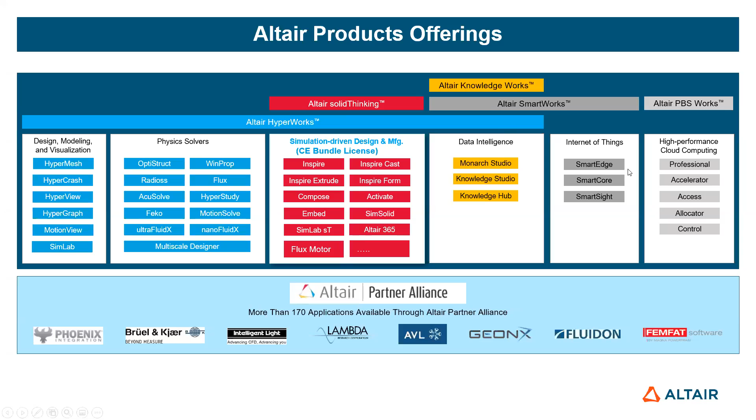And since there are hundreds of software products, it will be very difficult to talk about all of them. This slide helps me give you a very high level overview of the categories of software available from Altair. If you see the buckets in the center, each heading specifies a group of products, which gives you a hint of where our software is available. I take care of the center one, highlighted in red, that is simulation driven design and manufacturing products, related to mechanical, electronics, and all kinds of product creation and product design. And then we also have other products such as machine learning, IoT, and high performance computing.

So now coming to the topic for the day, that is simulation driven design. What do we mean by simulation driven design? You all know what design is, right? Simulation driven design is what we have been promoting for the last 5 years or so with our technology: when you are designing, performance of course should be your starting point. But we are going one step ahead and saying that not only performance, you also should consider manufacturability as your starting point and give it equal importance, if not more, when you actually start creating a product concept.

So by taking both these requirements, you will create your concept through the platform of Altair. And when your concept is ready, you will again validate that concept under the simulation driven design framework for both requirements, that is your performance requirement and your manufacturing requirement. As a result, when your design is completed using this methodology, you will not only ensure that your design is structurally or performance test worthy, but also that your design is manufacturing worthy.

So that means you will not have manufacturing defects, or you will have manufacturing defects which you know already. So you will not get any surprise. So that is, in a nutshell, what simulation driven design is.

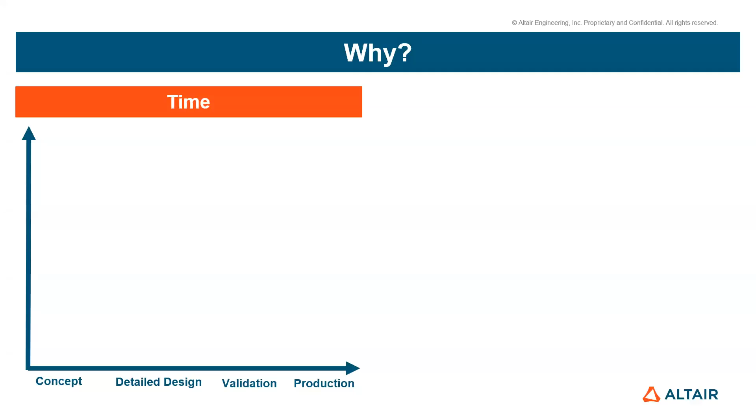Now, as you move from concept to production, you will probably agree with me that your freedom for design will keep on reducing. There are many reasons for that: you have already finalized some of the design, so your next department has also started preparing on the basis of your design. You might have already given a tooling kickoff to your supplier. You might have already planned your production facilities. That's why your design freedom keeps reducing as you go from concept to production.

But at the same time, very interestingly, one more thing happens. Your product knowledge keeps on increasing. I'm sorry, it's not a contradiction, I would say it is a dichotomy. Your product knowledge keeps increasing as you go from concept to production, obviously, because you gain a lot of experience from failure, from testing, from feedback from peers, from your market survey.

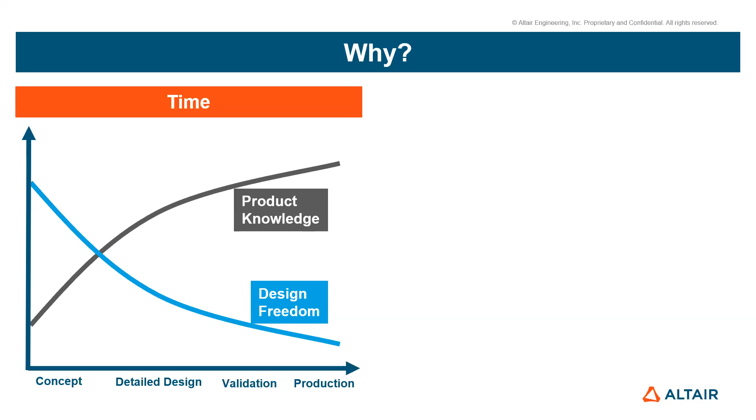That's where the dichotomy comes: you have a lot of product knowledge, but very little design freedom. This dichotomy is what we are going to solve with simulation driven design. We gain most of this product knowledge through simulation driven design and manufacturing tools right up front, very early in the design stage. So if you have product knowledge and also design freedom, you create far more efficient designs without spending too much on iterations. That's the time part of simulation driven design.

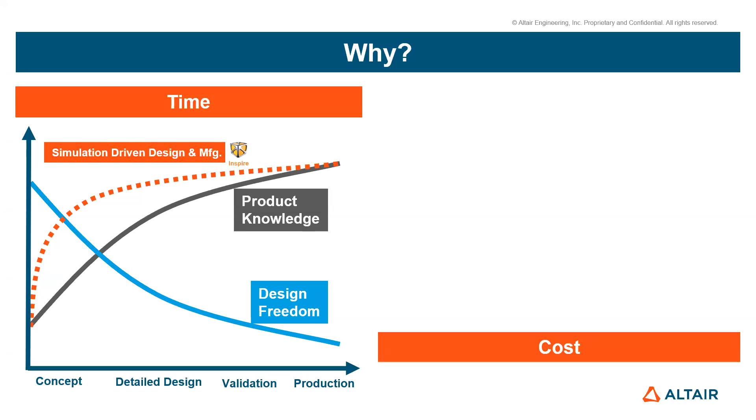As you go from concept towards production, your cost per design change keeps on increasing. Obviously, if you make a change in production, you have to change so many things. If you make a change in the concept, it changes only in the CAD tool on your computer, so it will not be costly. By the very nature of simulation driven design, most of the changes happen in the concept stage, as you have seen from the previous plot as well.

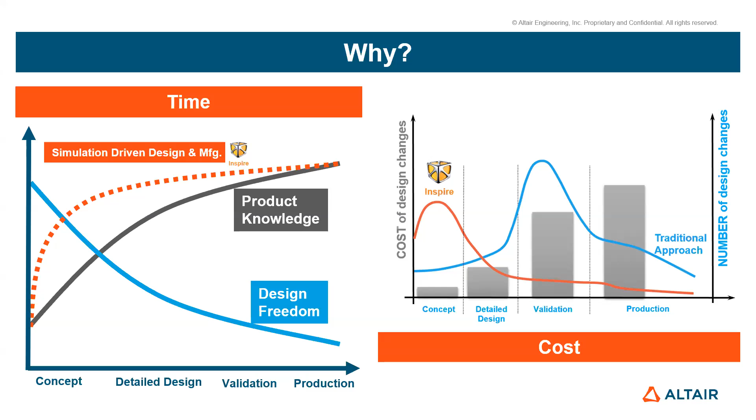With the conventional approach, typically most of the changes come from the validation stage, where the cost of change is high. So this is why we need simulation-driven design and manufacturing: to save time and cost. Now let's go to how we can achieve that.

The first step is to understand and quantify the performance target to redesign this component. Since this is part of a mechanism, you should have a mechanism simulation tool which will give you the loads coming on the system itself, on the brackets or the different joints, because this system is complex.

Your system can also be simple, where you may not have to do a mechanism study - you can directly know the load. For example, the professor was showing in our previous presentation the nose cone, where the loads are static structures, so the loads might be known upfront. But if the system has a mechanism, you may have to take a mechanism analysis tool to understand the load.

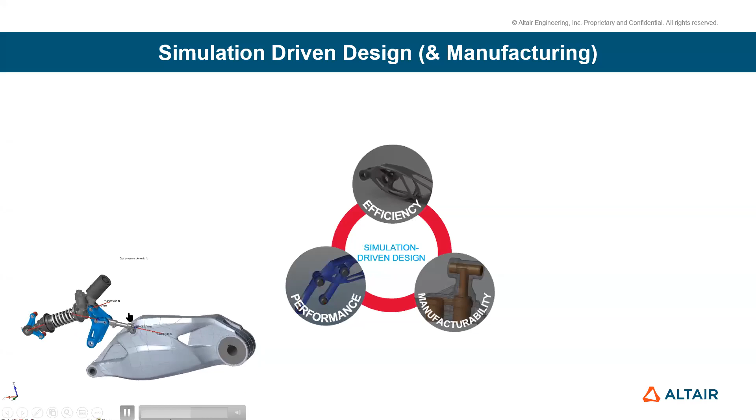I don't know whether these arrows are visible, but it is showing you the loads. Once you know the loads, you will create the recipe of your performance targets for different kind of load cases. For this two-wheeler, it might be braking, cornering, potholes, and all those kinds of load cases you will quantify and then use. So that takes care of the performance part.

Now what about the manufacturing part? If I plug a manufacturing requirement on top of it, the system will start doing the magic. Let's say I am making a design for machining - the system will take this same load and the input of your manufacturing process, which is machining in this case, and then redesign your concept, redesign your component, from this initial design to this new design, taking machining into consideration.

Now if I take casting as the manufacturing consideration, you will see that your design will change, because now your design should be castable. The same design cannot be made through casting, so your design should change for the same load condition and same input geometry. Same goes for other manufacturing processes, such as additive manufacturing - accordingly it will change its shape.

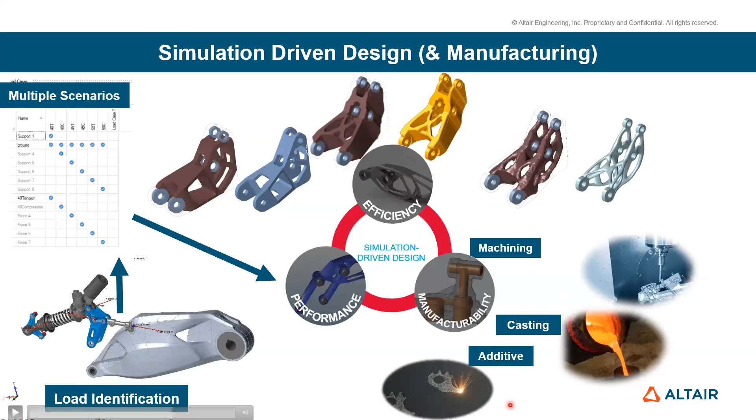All in all, you will end up getting different designs based on your input loading condition and manufacturing process requirement, and that's what you are seeing here. Those designs are suitable not only for conventional manufacturing processes, but also for different kinds of 3D printing manufacturing processes, or some hybrid manufacturing process as well. So this is how it works on a very high level.

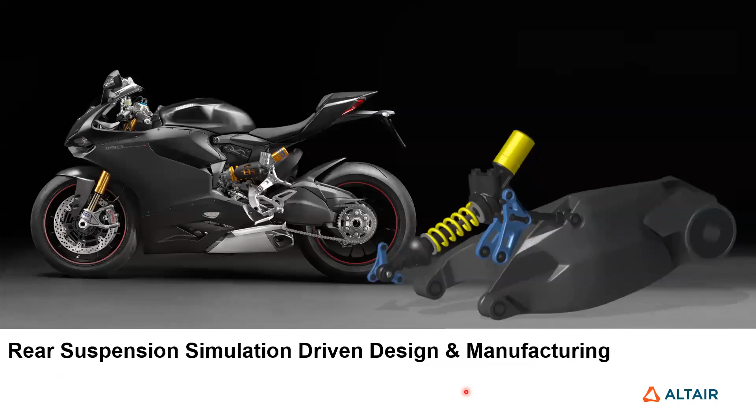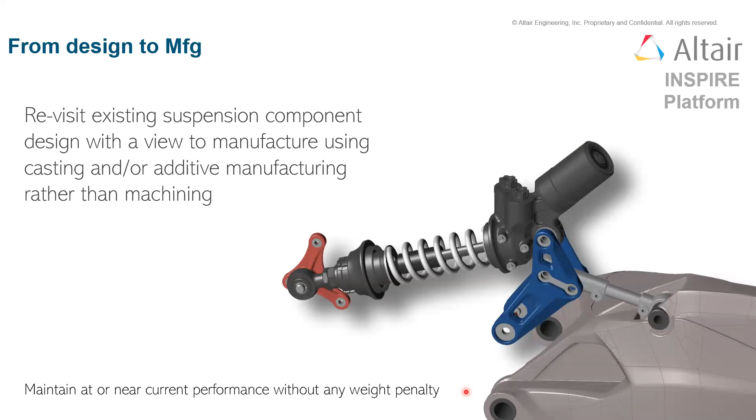Let's go into a little more detail with the same example, so we can understand it better and apply it. So let's say the same use case, the two-wheeler suspension bracket - now the color has changed here. You'll see the bottom is deep blue, and the top is deep red. We'll design both of these brackets for different manufacturing processes. Let's see how.

As we already saw in our previous slide, you first have to understand your loads. To understand your loads, there is a tool in our simulation driven design platform called Inspire Motion, which will help you very quickly and easily know what loads are coming on each of the joints based on your system's behavior. That's the first step.

Second is the design space. So what is design space - a new terminology? The design space is essentially the space created out of your existing design in a way that, after you remove those features which are non-functional in nature.

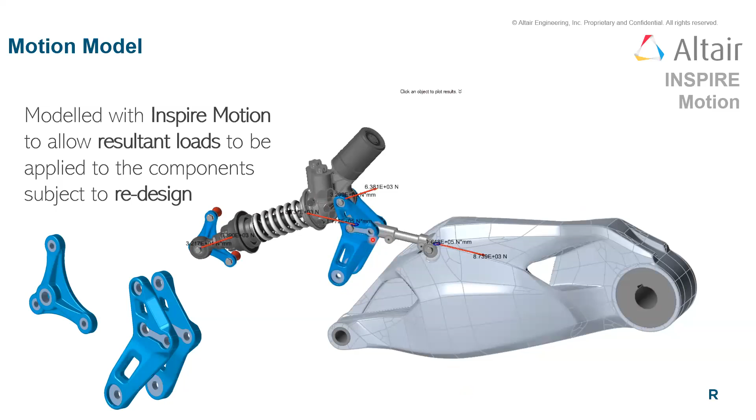If you go back to my previous slide, you see that this design has many cutouts and holes, but the cutouts, especially this center and side one, are actually non-functional in nature, meaning if you don't have those cutouts, the system will still perform. However, there are other kinds of holes, like the fixing holes. Those are essential features, you cannot remove those. If you remove those, your system will not work. So what we did is, while creating the design space, we filled up all those features which are non-functional in nature, and that's how you get the filled space called design space.

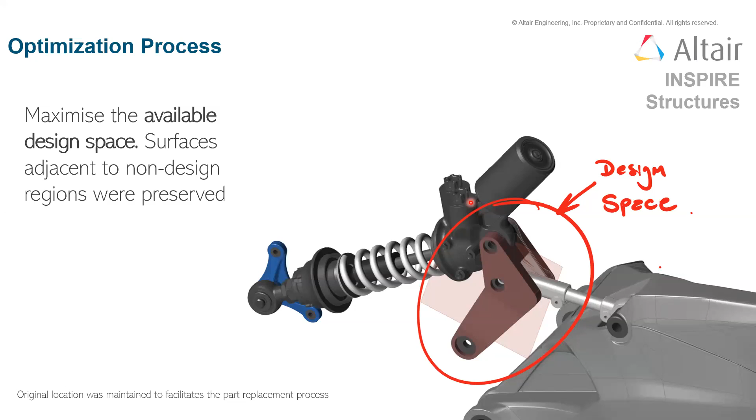Once you get the design space and know the loads, you also know the manufacturing process. So this is how you tell the system what manufacturing process you are looking for. In this particular case, for this bottom bracket, we intend to manufacture it through 3D printing. And if you want to manufacture through 3D printing, you have to tell the software what is the direction of your printing. That's what you're seeing over here.

After you tell those three things - the direction of your printing, your design space, and your load cases - the software will generate the concept which suits all these three requirements. That's how you create the concept of your design based on these requirements.

Now this is the first step. The second step is revalidating this concept for both requirements - your manufacturing requirement, to understand if there will be any manufacturing defect, and also the structural test. That means you're going to run an FE simulation to understand the strength and durability of this bracket. So after you create the concept, you create a detailed design.

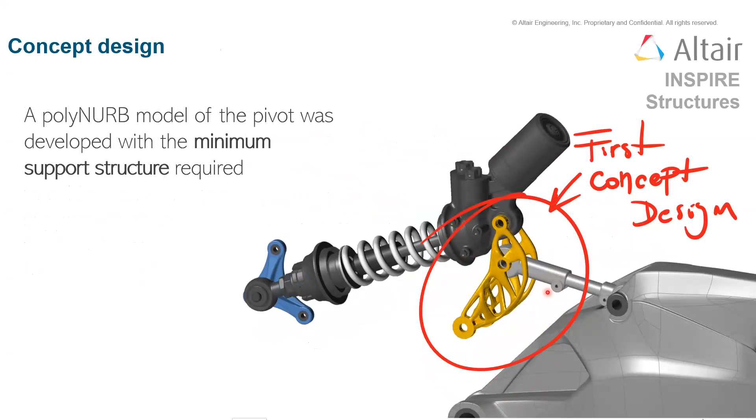Then what we're doing is actually a manufacturing test, or manufacturing process simulation. This particular process is for 3D printing, so you see we're doing a 3D printing process simulation to understand the temperatures, distortion, or residual stresses under different conditions - say after putting the supports and then removing them, and so many other ways. I won't go into detail, but we are doing a manufacturing process simulation.

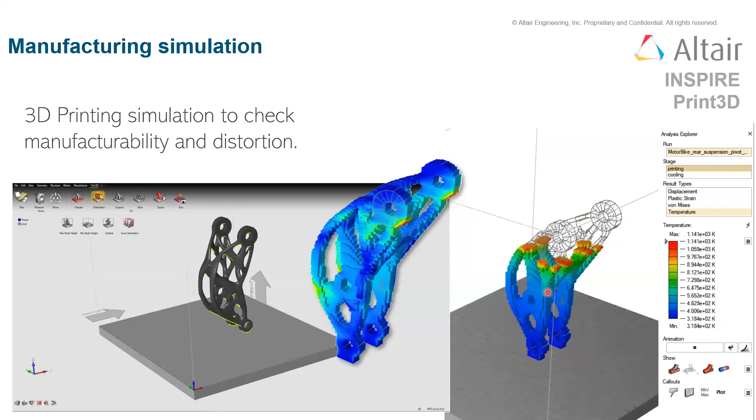Similarly, we have done a structural simulation as well to understand the strength of this component. Now let's go back to the other bracket, the top one, where we are going to design it through a casting process. Same way, we already know the loads, and this design space has been created.

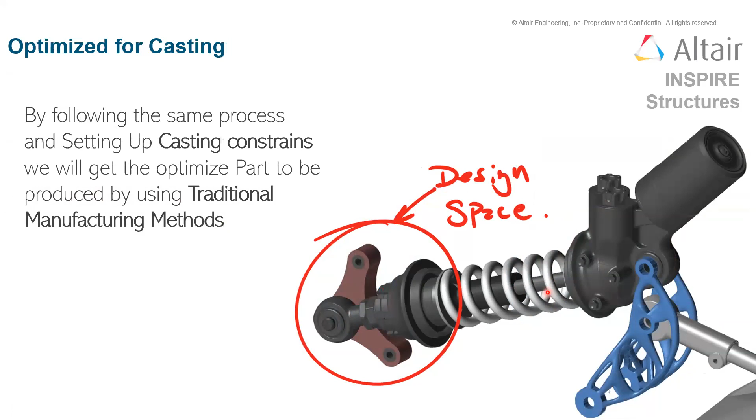Now if I go over here, it will create the concept of your casting design. So this is a casting design. And again, if it's a casting design, you have to go for casting process simulation after doing your structural simulation. Casting process simulation means you have to create all those - you can do it simply with just the component, or make it more complicated by putting some gating system, feeding system, and riser systems, and do a wide variety of casting process simulation to understand if there are any defects going to come when we send this design to our manufacturing team.

So to summarize, what is the workflow we followed here? We started with identification of the load. This can be done very simply by a simple hand calculation, or you may have to take help from our MBD tool, that is Inspire Motion. Then once you identify the load, you supply that load to the concept generation algorithm within the Inspire platform, which is our simulation driven design platform.

On top of that, you also supply your process input - so you're supplying your force loads and your process input, and then it will create the concept of design. That concept can be detailed either within the Inspire platform, or you can take it to your CAD system, detail it, and bring it back. Then you go for performance validation - you take the same loads you identified and do a performance validation study.

And then you will go for process validation, where you check for manufacturing process defects. So that's the workflow.

And since these things are tightly integrated in a single platform, it gives wide varieties of possibilities to do a lot of what-if studies, right? And that's the power of this platform. This platform is extremely easy to use, but at the same time, at the back end, it takes a lot of development effort and a lot of algorithms working together for this platform to work.

So some of these algorithms are mentioned here, which are working in the back end of this platform. And you don't have to know anything. You just have to define your problem, and it will be taken care of by the different algorithm or different solver in the back end.

Right from our MBD algorithm, which is Inspire Motion, then our optimization algorithm, which is called Inspire Structures. And then there is a very important structural validation algorithm, which Inspire Structures can also do some part of. And of late, we have integrated our SimSolid, which is a meshless structural validation algorithm that gives very accurate yet very fast structural simulation results.

Then there are geometry algorithms, and multiple types of manufacturing process algorithms. For example, casting with Inspire Cast, sheet metal forming with Inspire Form, injection molding for metal and polymer, extrusion of metal and polymer with Inspire Extrude, Inspire Print 3D for 3D printing, Inspire Mold for injection molding, and Inspire PolyFoam for polyurethane foam simulation. All in a single platform, helping you do a simulation-driven design process for any design problem.

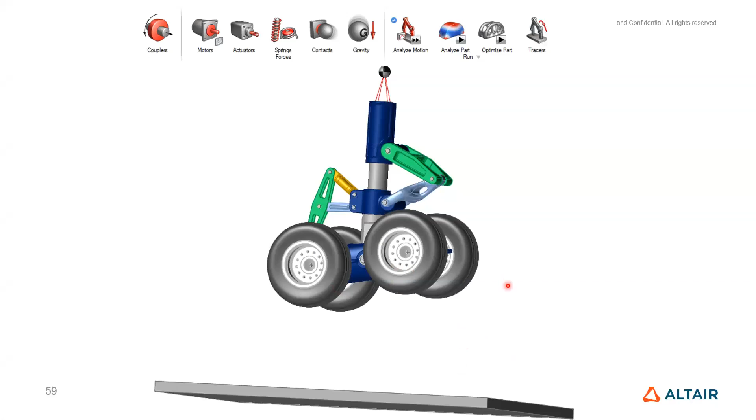In this particular case, we are interested in these brackets, the two brackets of the landing gear. You'll see how this methodology and platform helps you redesign this. So this is the design, this is the system we have.

This is a landing gear, and it has a lot of mechanisms, so it's quite complex. It has many components connecting with each other, which have to work in tandem, and there are many loads coming in. Out of this, I am taking this and this part for my study.

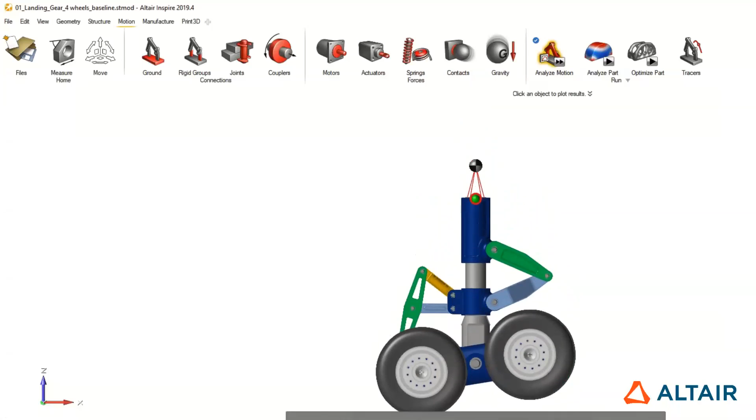So the first thing we have to do is make sure we know the loading condition, because this part is again part of a very big system. To know the load condition or identify the load, we again have to take help of our Inspire Motion.

It helps you define different kinds of springs and other actuators, and has a lot of customizable materials. Then ultimately we will do the simulation, which has been shown here, and you will see how the loads are coming on each of those joints. You will understand how the loads are coming on each joint, and those are very important.

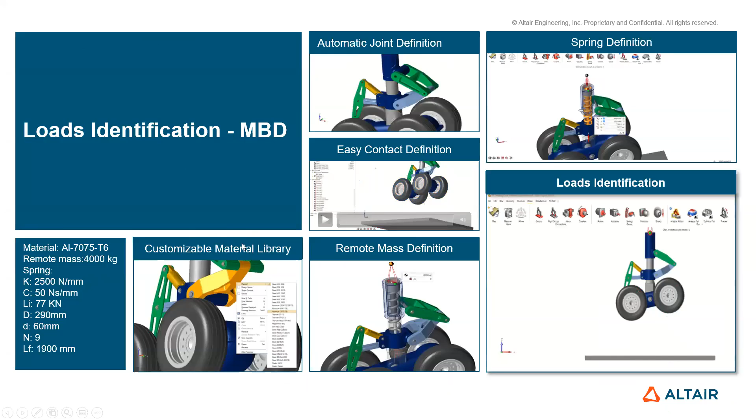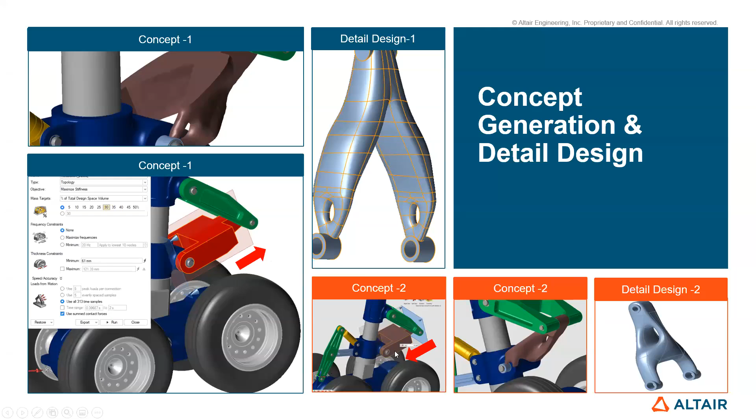So if you compare this concept and this concept, both are capable of taking the loading we calculated in the previous step. But by changing the direction, it gives a different kind of concept, because ultimately it is related to the least amount of support as far as 3D printing is concerned. Based on the printing direction, it will give you a design which will have the least amount of support. So that's why changing the printing direction changes the design altogether. Once you have the design ready for both concepts, the difference between concept one and concept two is the change in printing direction and thus the change in the geometry.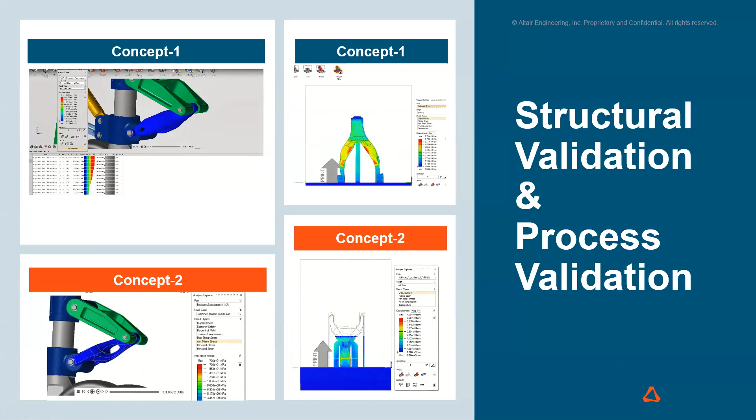But if you see the printing direction here while simulating, it is opposite. That's what we assumed. And as a result, we are achieving a little less displacement than concept one. So the idea here is to show the different possibilities; you can use this tool for different what-if conditions when you are designing something very complex and very delicate as far as the targets are concerned. Now, this is the first bracket of this landing gear suspension. The other bracket we have done again.

So let me go to the next one. Another bracket, this one, we have designed for casting as well. So you see that it gives you a different kind of design; your 3D printing design and your casting design are different. And again, you can check your manufacturing process. Here it is casting. You can understand different configurations for the manufacturing process: either you take a single part and put your risers, or you put a feeder and all together. So that's how it is happening. This is the simulation-driven design and manufacturing process for this aircraft bracket. Now, so far, all the examples I have shown are solid components.

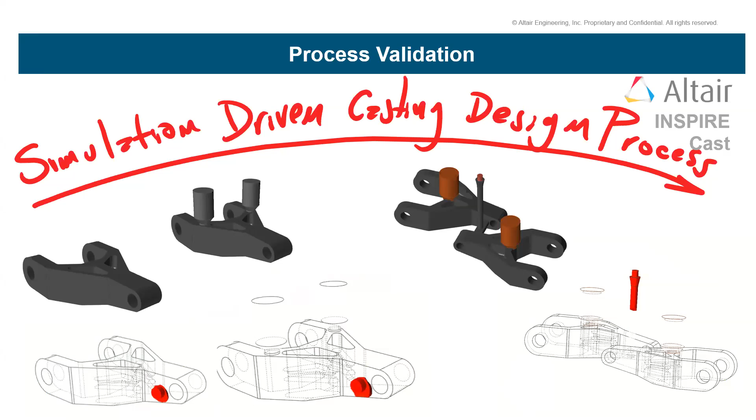What about sheet metal kind of design? Let me show how you can work even for sheet metal design, or plastic injection molded design as well. So let's say you have a component like this, a sheet metal component, where you want to apply the simulation-driven design and manufacturing methodology. Just a minute.

Okay, so now let's see how this works when you have a sheet metal kind of design. In this particular case, our need is to achieve a higher frequency. Higher frequency means higher stiffness. Right now this is a sheet metal component where we are achieving around 1041 hertz as my frequency, but we have to achieve more than 1100. So let's see how this simulation driven design methodology works over here.

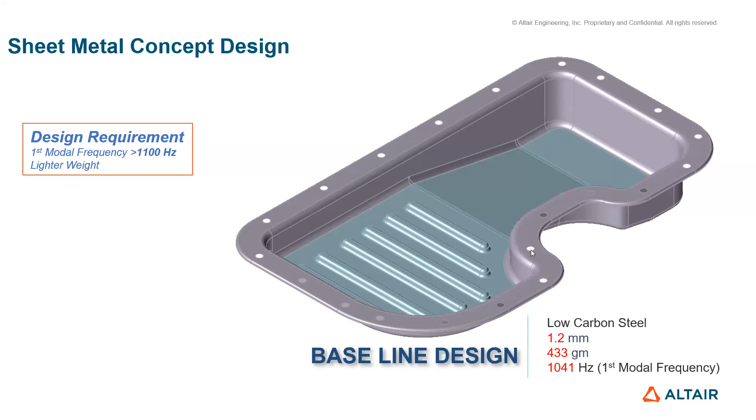For sheet metal kind of design, we have to reposition or reorient these beads. To do that, we first get rid of the existing beads, and then we take help of our same simulation driven design methodology, which will allow you to redesign or recreate your ribbing pattern. My previous ribs were somewhere here, and it has recreated the rib pattern.

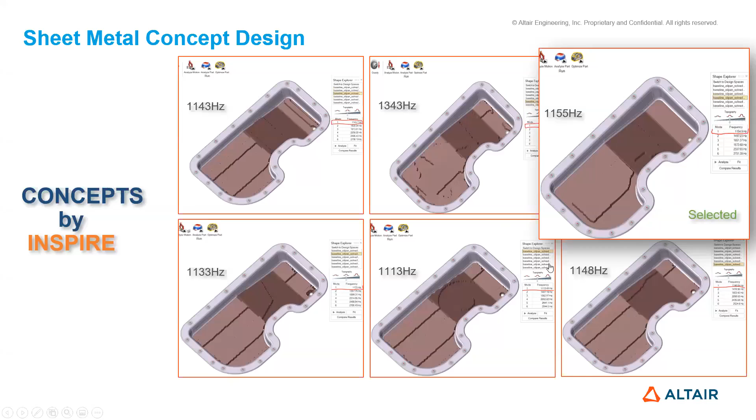In my existing design I'm getting a frequency of around 1000 hertz. However, when I recreate the design pattern, there are many options possible. I can go up to 1300 hertz as well, but those designs are getting complicated. So I choose this design, which is a little less than 1343, but my tooling design is much simpler. When that is selected, I crossed 1100 hertz.

Once that is done, that is the first part, your structural requirement. What about your process requirement? In this case I have to manufacture it through a forming process, and this design is giving me around 40% sheet metal thinning in this area, which may not be acceptable. So then we redesigned it.

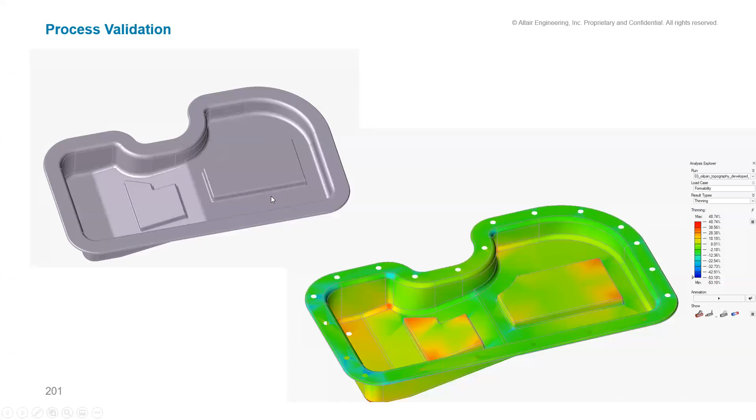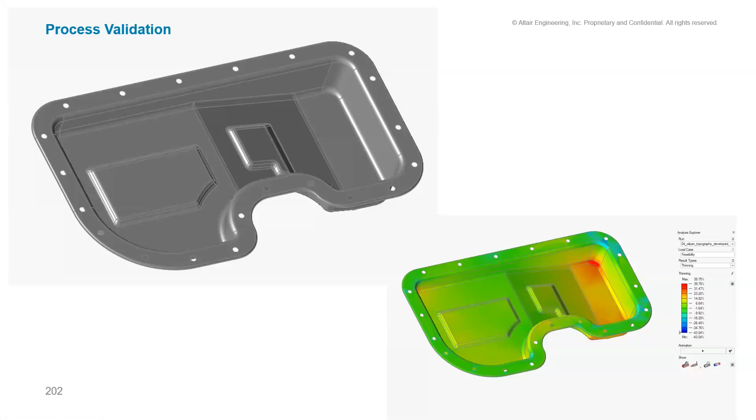Okay, so we have to redesign this and make sure that these fillets and this draft angle are redesigned. After redesigning, you see that your thinning percentage has reduced below the previous one. So that's how you can apply simulation driven design for sheet metal kind of design as well.

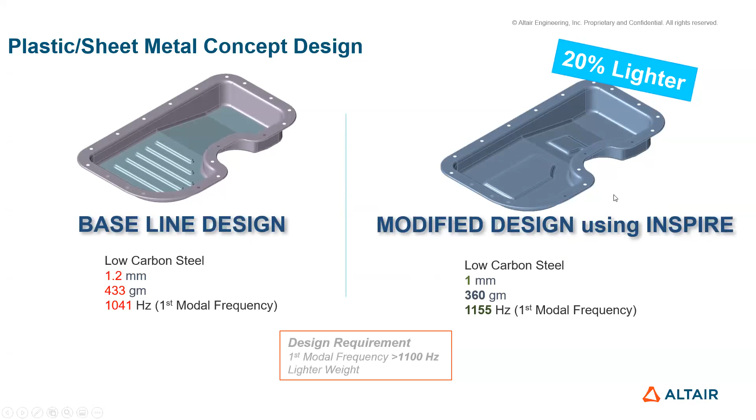After you do that, you can even go for further process validation. You can take a complete tooling system and do the thinning calculation, forming calculation, and so on. Ultimately, your baseline design was 1041 hertz first modal frequency, and it has increased to 1155. And I could achieve that with a 1 sheet, where earlier it was 1.2. So I'm achieving not only a stiffer design, but also a lighter design. That's the benefit of simulation driven design.

This is the complete workflow. We started with the existing CAD, did a baseline understanding of our frequencies, and then went for concept generation. Then we check our manufacturing process simulation. Since this is sheet metal, we check our sheet metal forming simulation, achieve the required thickness within an acceptable level, and finally find the detailed design. That's how we achieved a lighter design, but stiffer at the same time.

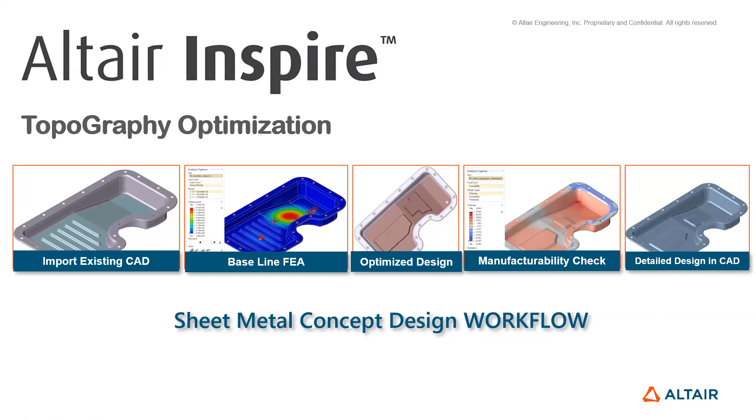Okay, so now I will come back to the slide where I started, talking about the complete Inspire platform and the tools available in this Inspire platform, which is our simulation driven design platform.

So another important tool within this platform is our structural validation tool, since structural validation is an integral and very important part of the simulation-driven design process, like our manufacturing process simulation. So I would like to spend some time showcasing some other capabilities of structural validation, where we recently integrated a technology called Altair SimSolid.

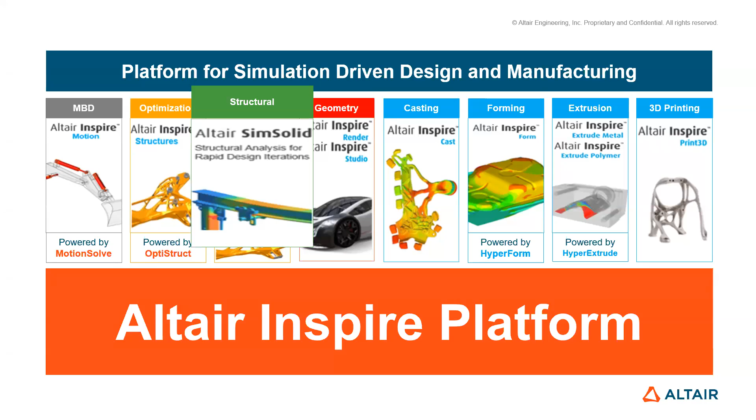SimSolid is a new technology which has been integrated in this platform, with the aim to give you more power on the structural validation side. So what is SimSolid? SimSolid is a structural simulation solver integrated within our Inspire platform, which operates directly on original unsimplified CAD geometry and does not create a mesh. So what are the benefits of these bold words?

It works on original unsimplified CAD geometry. That means you don't have to do any defeaturing or geometry simplification. We believe SimSolid will give you much more credibility in your simulation, because you are actually simulating the part which is going to be in the field, rather than manipulating the features. If you remove holes and tiny features and then do the simulation, you are not simulating the same part which is in the field.

We don't have to do that with SimSolid, because it is capable of solving with all those detailed features. And it doesn't create a mesh, which means you don't have to spend time creating the mesh. You save time on geometry simplification and on meshing. And it gives results in seconds to minutes. That's the most important thing.

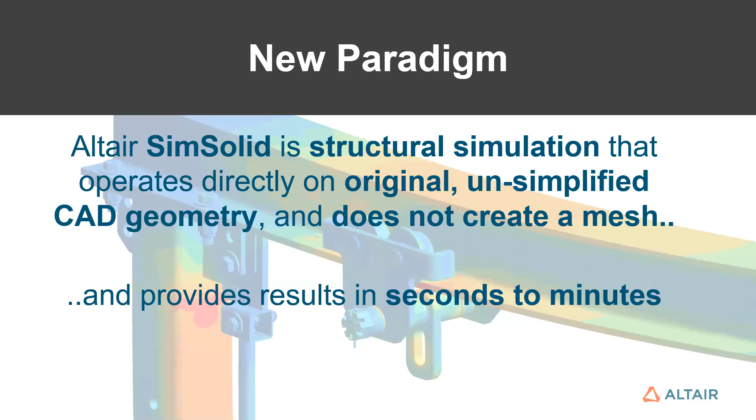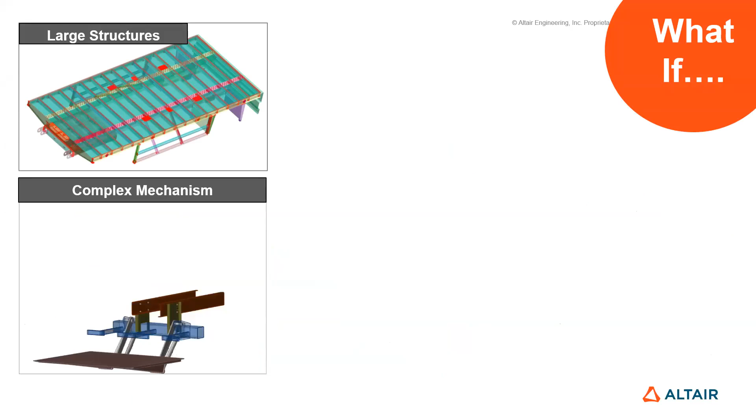So if you have to do very complex simulation of a very large, complicated structure, and you have to do a wide variety of simulations without spending much time, SimSolid is the solver for you. For this tool, it would be an injustice to show it only on PowerPoint. I'll go to the tool itself so that I can show you the speed I'm talking about.

So this is the tool. Let me very quickly bring in a CAD model. I can bring any kind of CAD model, neutral or proprietary, such as CATIA, ProE, Siemens NX, SolidWorks, and also Parasolid, STEP, and all those things. So I'm importing a Parasolid file over here.

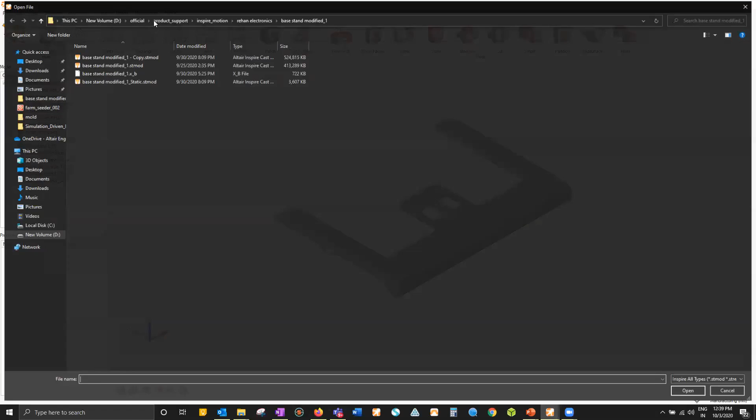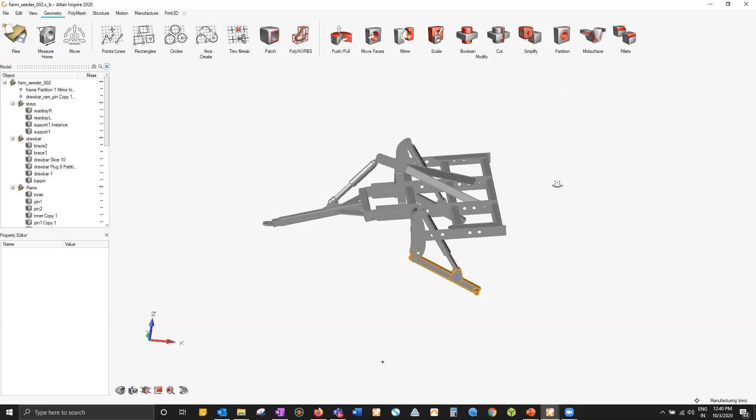Oops, not this one, sorry. Let me go to the product demo model. Let me bring this one. Okay, so this is a farm seeder assembly. It is not extremely large, but it has a large number of components and joints. So let's see how SimSolid helps us solve it very quickly.

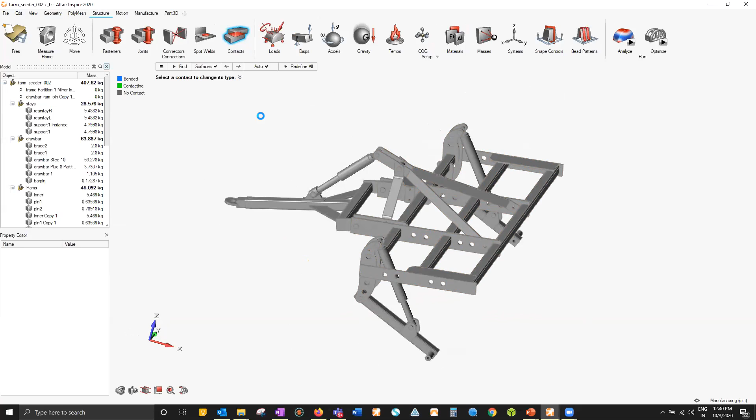So how to set it up? First, since this is an assembly, you have to make sure all the connections are connected properly, so you check contacts. You'll see that it automatically detects those contacts, and I can change them. Right now it is bonded contact, but I can change it to other types of contact as well. For now, bonded contact should be good enough. So my contact definition is done.

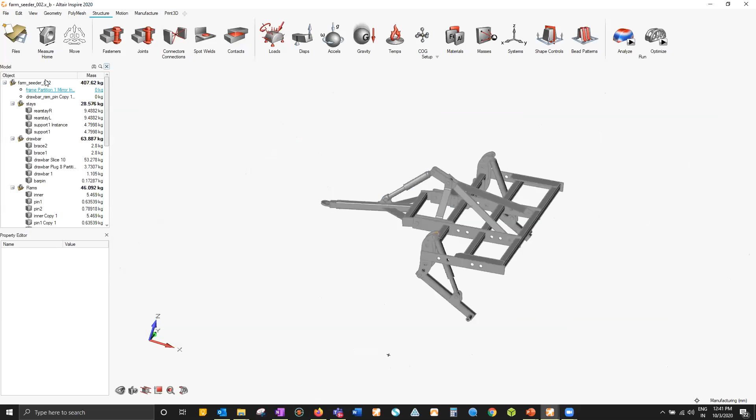Next, I'll go to my material definition. There is a material library you can choose from, or you can create your own material as well. And next, you apply your loads and boundary conditions.

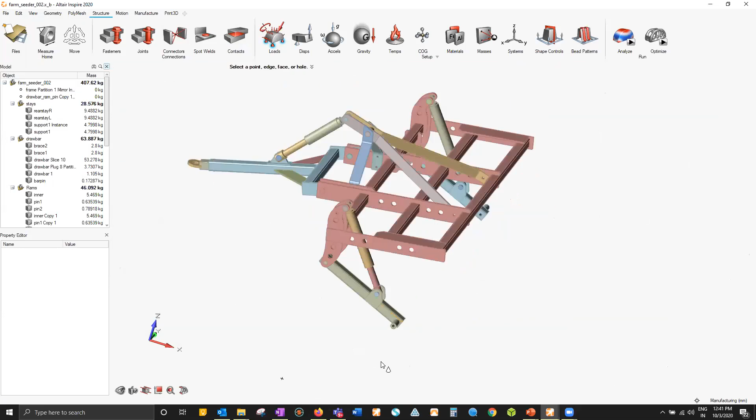So what are the loads and boundary conditions I am applying? Since this is a farm seeder, it will be plugged into your soil. That's why you will have to apply a support over here. So this is my support where rotation is free. I'm applying a support, and at the same time, I'm making the rotation free, right?

I'll apply another support, which is over here. And then I'll also allow some of the degrees of freedom free. So essentially I'm leaving those lateral degrees of freedom free. Essentially this attachment will be connected to a tractor, so that pulling load also has to be applied.

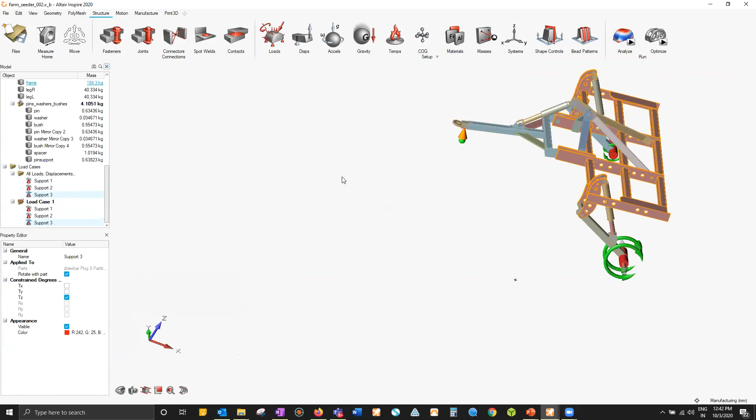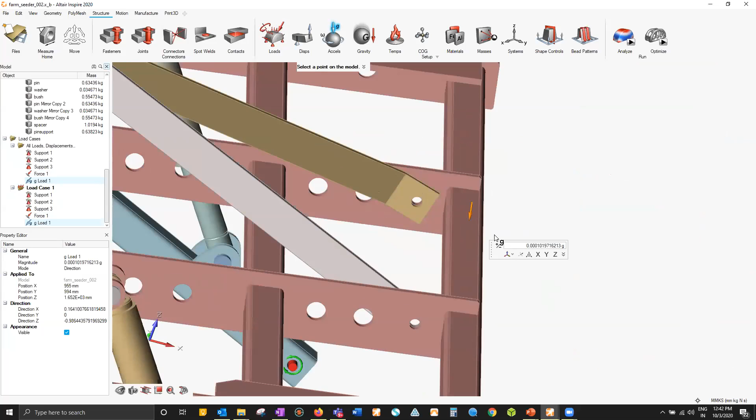So maybe I'll apply 5,000 Newton as my pulling load. And then I'll apply some more abuse load in terms of G. So let's say I will apply a 4G downward load in this particular location. And that's it. You don't have to do anything else to do a structural simulation.

So this is a part whose concept you have generated through our simulation driven design platform, and now you are revalidating it. All you have to do is go over here, click analysis, and I am analyzing this large assembly live. I have not solved it before, so right now I am solving it. Let's see the time it takes to solve.

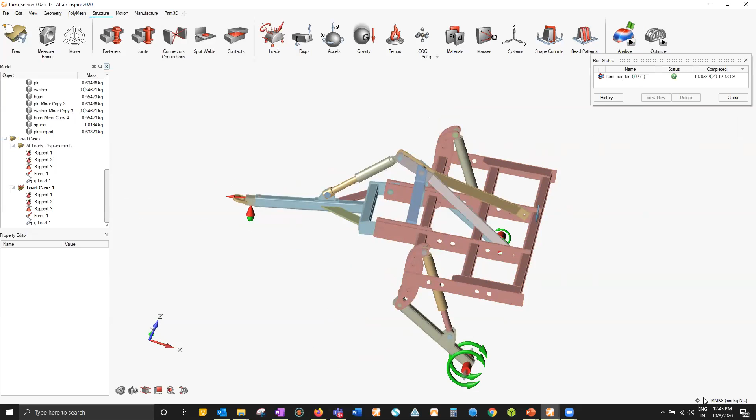Okay, so it is 12:43. I don't have a mechanism to measure seconds. So it is 12:43. Oh, it's done. So it is not even a minute. That's why I was concerned about not being able to measure in seconds, but it is done.

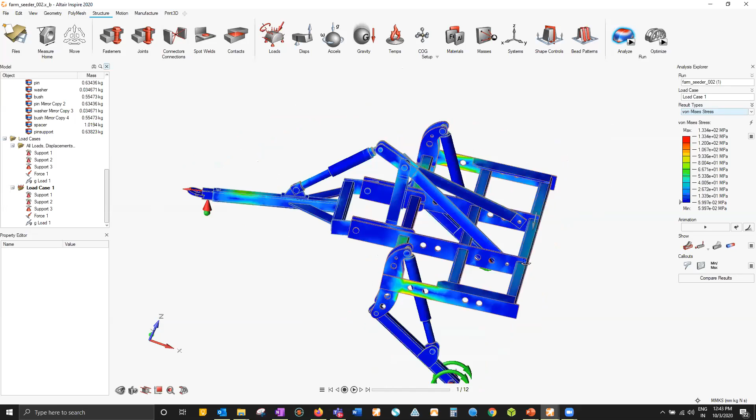So now if I check the result, it will give me the results. So this is the displacement. You can check stress, strain, displacement, reaction forces, and all those things, pretty much what you do. So these are the stress plots. You can do animation and all those things.

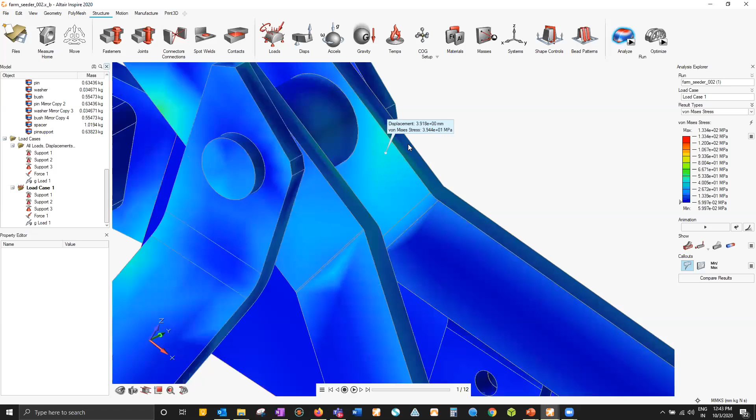So now let's see another interesting thing. Let's check the stress in a particular location like here. This is telling me around 39 MPa. Let me also see the displacement over here. This is telling me a displacement of 3.9 mm. So 39 MPa and 3.9 mm. Now as a design engineer, what if I would like to reduce this value further?

As a design engineer, there might be an idea: why not apply some reinforcement in this area? It's very simple over here. I go to my geometry tab, create another part, and create the reinforcement right here within the tool. So I'll apply reinforcement like this, pull this inside, and make it bigger.

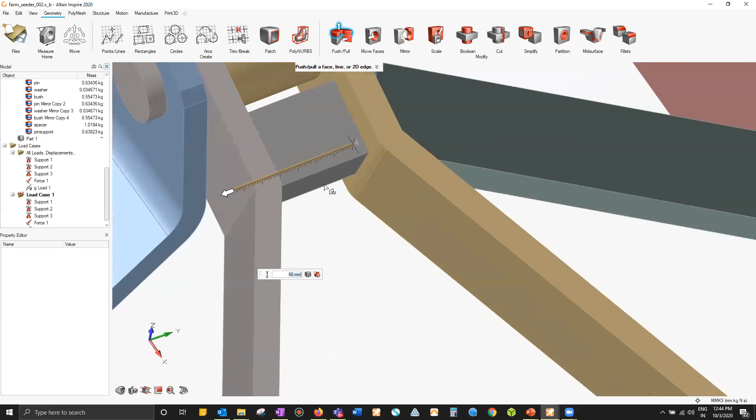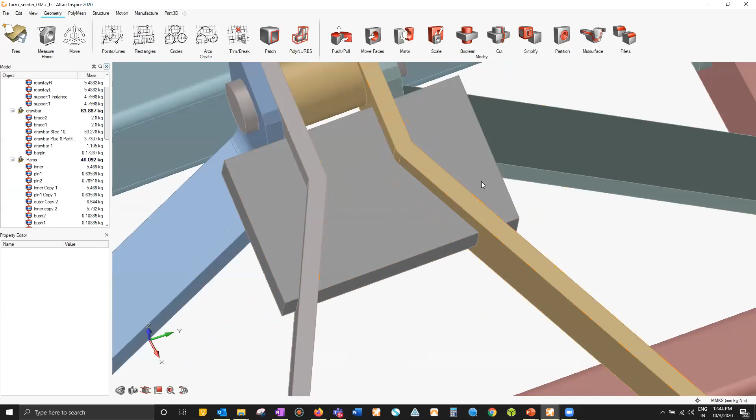Maybe I'll make it up to this. Okay, so now it is extra, so let me cut the unwanted things. Maybe I'll remove this and this. And then I'll convert bodies to parts. So this is my new design now, with an extra part, which is a reinforcement.

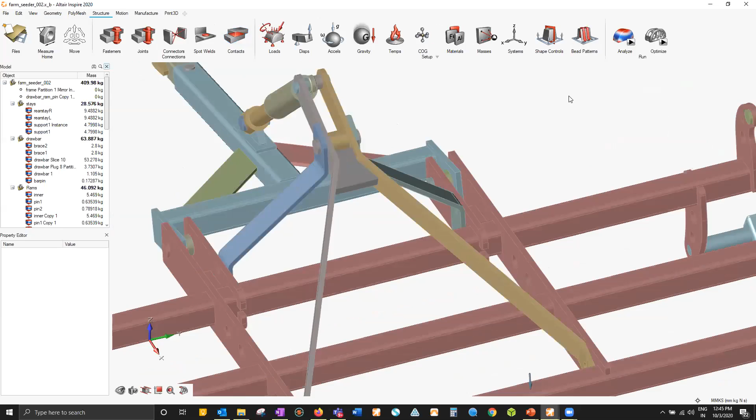Since I have an extra part, I also have to make sure that contacts are established. It is very important that your contact is established to have a correct analysis. And then you do the same process again. I'll run it again to compare what is happening to the stress over here. It is done within a few seconds.

I'll go over here. So this is my new design. Now, if you remember, my previous stress value was around 39 MPa. It has become 13 MPa.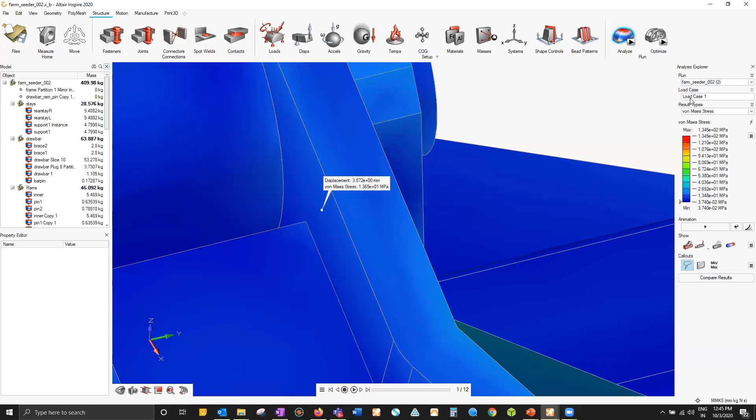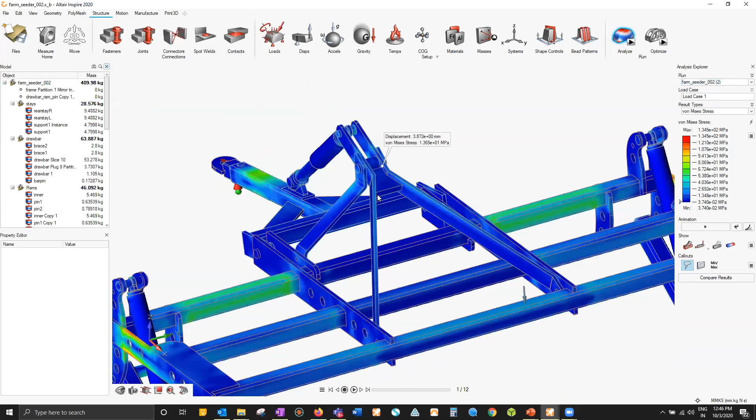If I go back to my previous result, so this is my previous result. So this was 39 MPa and 3.9 mm as my displacement. Now in the new design, I got 3.8 mm displacement, but my stress dropped down from 39 MPa to 13 MPa. So within a few minutes, I could come out with a new design. Not only that, I could quickly validate it and understand how this design modification is affecting the performance of the system.

So this is the power of SimSolid integration within our Inspire platform, which is a simulation-driven design platform. So whatever I have discussed so far on Inspire, this is an added benefit. That means now, after you come to that concept stage, step 2 or step 3, you have an option to do the performance validation using this super fast methodology with SimSolid, which will save a lot of time, and you can do a lot of iterations.

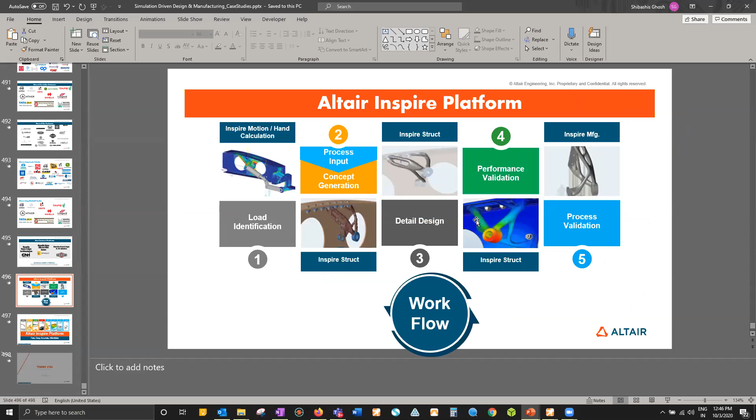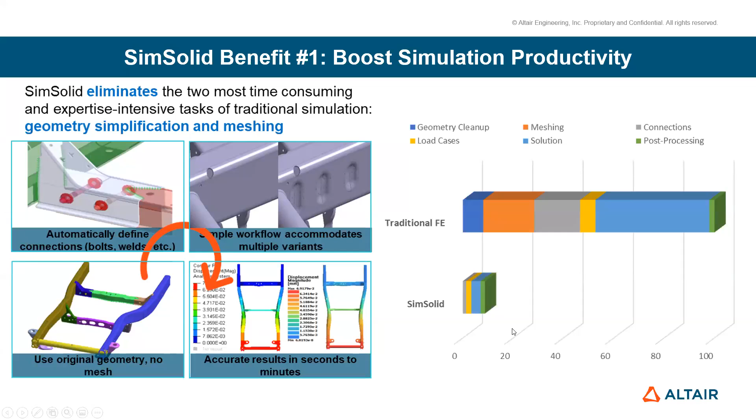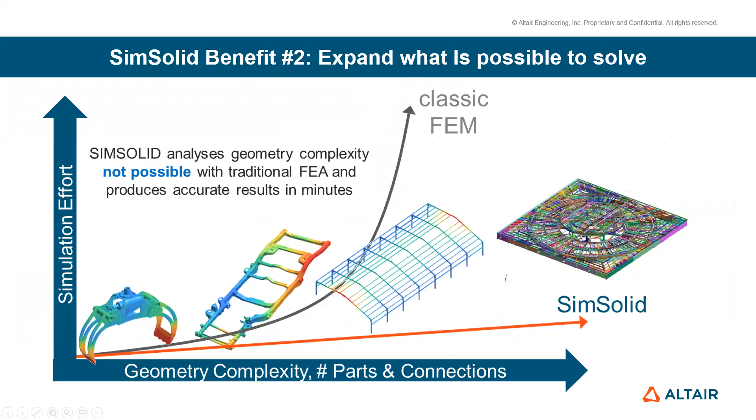With SimSolid, since it is capable of solving very large, very complicated assemblies and geometries, you don't have to shy away from the size of the problem, which was the case conventionally, right? Say this particular structural assembly has around 8,000 components. Those kinds of problems take drastically long if you try to solve them conventionally, which is not the case for SimSolid.

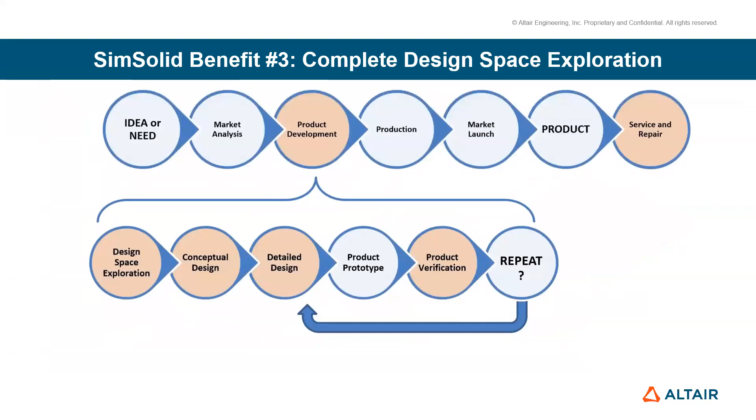And the third benefit is that since this is super fast as far as validation is concerned, if you have multiple concepts, you don't have to take a judgmental decision. You can just run through FEA very quickly and decide which one is performing better. So that way you are not losing any opportunity to get the optimum design, right?

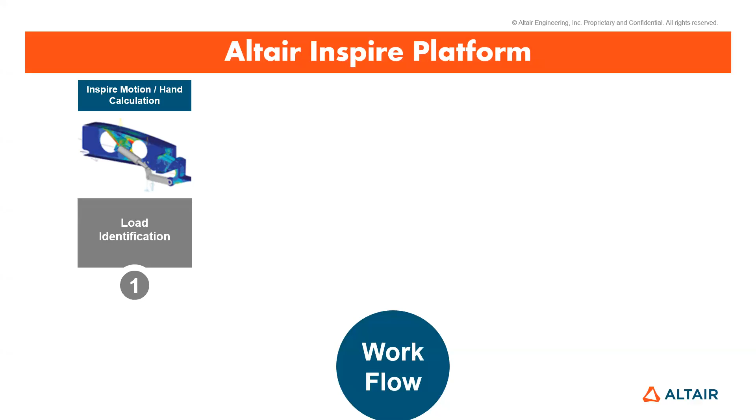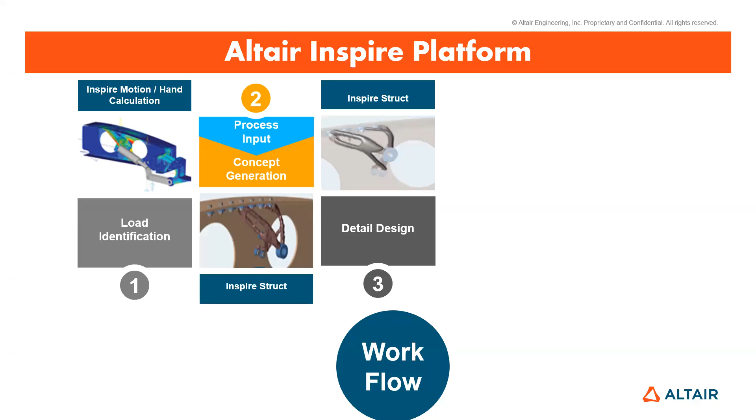First step is your load identification. You can do it through hand calculation, or you can use Inspire Motion, which is an MBD-based tool integrated within the Inspire platform, which will let you know the loads coming on each of the joints. Then in the second stage, you supply that load and your process requirements, and generate your concept. Once the concept is generated, you detail it, either within the Inspire platform, or you take that generated concept out into your CAD detailing platform such as CATIA or Pro E, and then bring it back here.

And then you do a performance validation. Either you can do it with Inspire's native structural validation algorithm, which is a mesh-based technology, or you can do the performance validation with Inspire's SimSolid algorithm, which is a mesh-less technology.

So both options are available to you. Either you can do a mesh-based technology, or you can do the performance validation with a mesh-less technology. And then finally, you do the manufacturing process validation with a wide variety of manufacturing process simulation tools, such as casting, forming, extrusion, injection molding, 3D printing, as well as polyfoam.

Since this is a platform for simulation driven design, you can take benefit of all these steps, but it is not always necessary that you have to follow from start to end. You can also take benefit of the individual steps as well. For example, your aim may be, for some problem, just to do the structural validation. Absolutely okay, you can just do the structural validation with our structural validation capability within Inspire platform. Or you can just do the concept optimization, so that is absolutely fine. Or you can just generate the design, or do the motion study, or do the manufacturing process simulation of the part which you have already designed elsewhere. So either you can take benefit of the combined capability of all the capabilities of Inspire platform and then create your concept, or you can take benefit of each of those capabilities as and when required, and both ways are okay for Inspire platform to use.

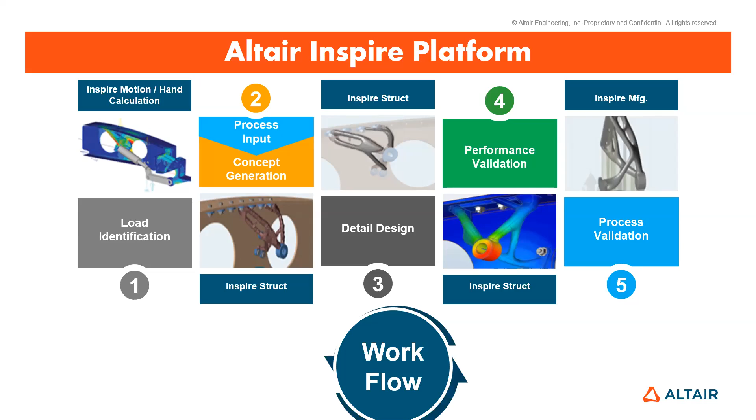Now coming to the tools in the backend. It has Altair Inspire Motion, which is the MBD tool, then Inspire Struct, which runs the optimization. Then Altair SimSolid and Inspire Struct again can help you do structural validation, either through meshless method using the Altair SimSolid algorithm, or structural mesh-based method with Inspire Struct. Then for geometry creation, we use Inspire Studio. And for casting we have Inspire Cast, forming Inspire Form, extrusion Inspire Extrude, and Inspire Print 3D. There are many more actually - injection molding and polyfoam are not shown in this slide.

So with that, I'll end my session, and I'll be open to take any questions regarding this.